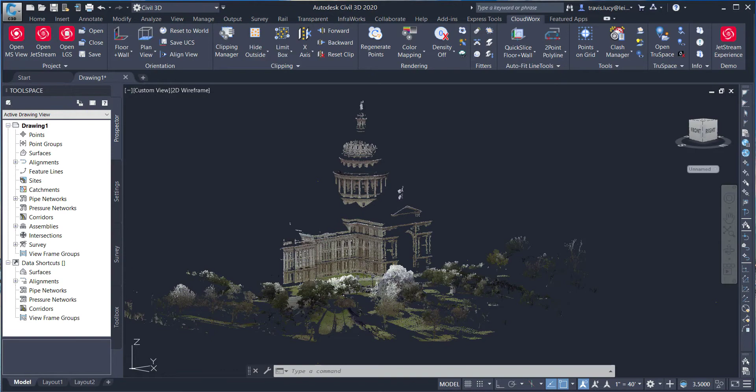In this video, we're going to see the tools offered in the rendering panel and how we can change the way the point cloud is displayed. We will find in the panel 6 different tools shown for rendering.

Moving from left to right, the first is Regenerate Points. While working on a CloudWorx project, if we ever suspect that we do not have all of the points available in view, hit Regenerate Points. This will bring all the points back that may have been invisible.

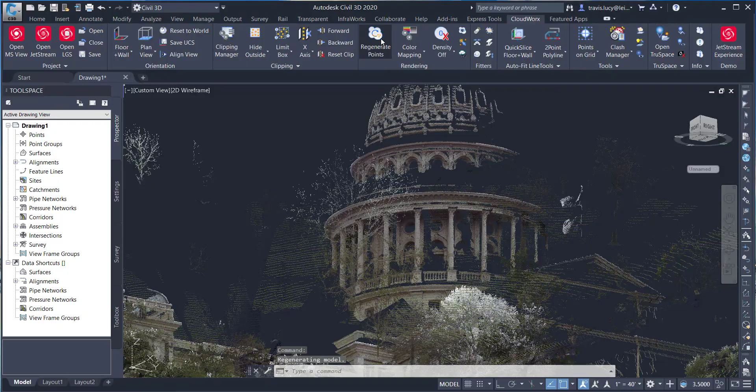The next tool is Color Mapping. Color mapping allows for us to select styles consisting of true color, intensity mapping, elevation mapping, distance mapping, and appearance. Because true color and intensity mapping are the most common transitions working with point clouds, both of these options are also available for selection in the drop-down arrow of the color mapping button.

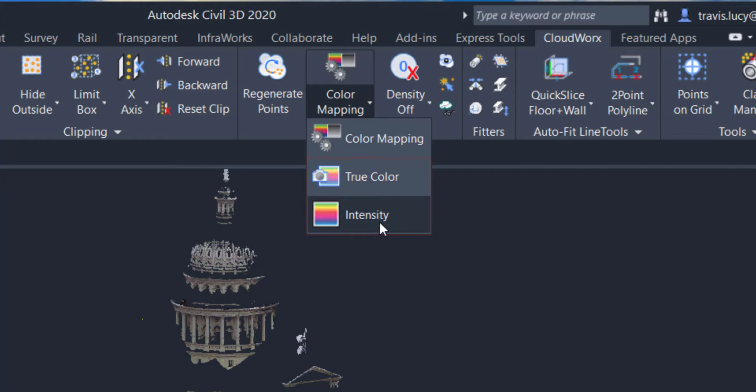True color shows the point cloud colorized from the images taken while scanning. These can be from internal or external cameras. Intensity mapping is colorized by the strength of the laser return. The higher intensity return points will receive cooler colored points that are on the blue end of the spectrum, while the lower intensity return points will receive warmer colors, more towards the red end of the color spectrum.

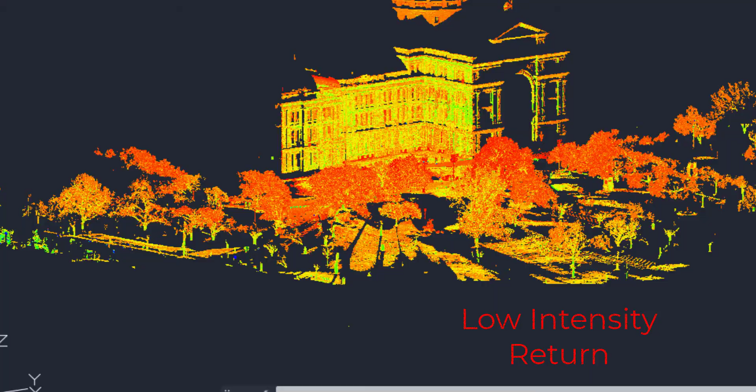Most of us find it easier to see the fine details within point clouds using intensity mapping. So if we are scanning for data extraction only, and the images and colorization are not needed for other purposes, we can cut a significant amount of time in the field collection and the data processing, as well as reduce the file size if we opt out of collecting images.

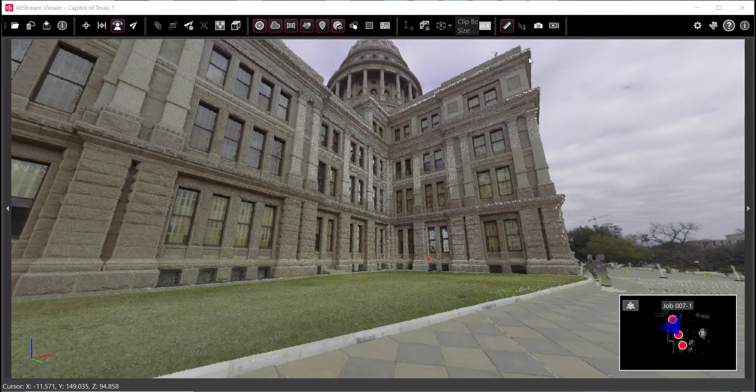However, capturing images can have a significant benefit if you're using other applications in which photo images are ideal. I will cover one of these instances as it applies to CloudWorx in a later video in this series.

Looking at other settings within the color mapping dialog box, we will see a drop-down for color scheme. If our eyes are better suited for different brightnesses of the same color, we have options for scales of gray, red, green, or blue. If we select grayscale and move the gamma correction value closer to 0, we will brighten the cloud color if it appears to be too dim.

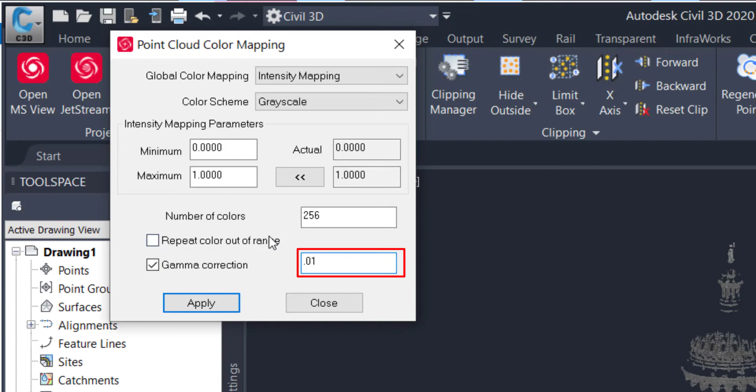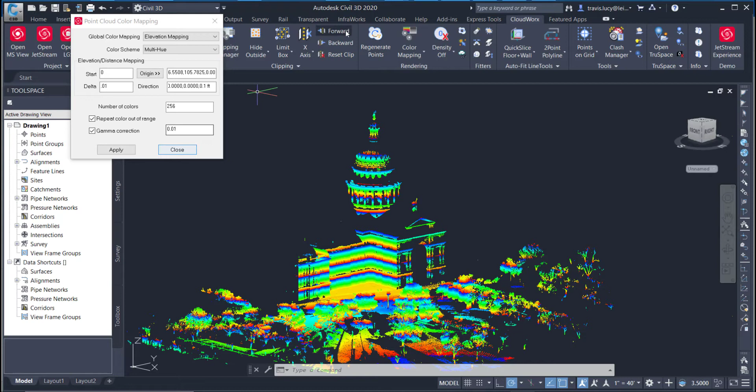Elevation mapping will color the point cloud based off the Z value of the points and the parameters we set. You can pick the origin to get your benchmark and set the distance of the changing color by entering in a delta and a moving direction from Z. This is a helpful feature when you have elevation changes that you would like to have stick out, or on roads when locating manholes or potholes by highlighting the changes in elevation.

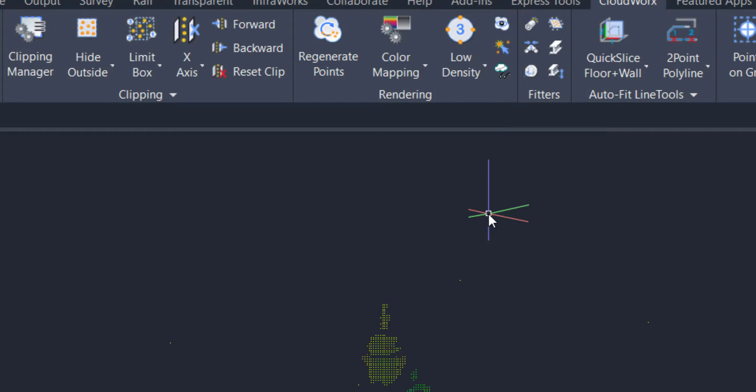Distance mapping uses the same concept as elevation, except it uses the horizontal direction. The density setting can be used to help reduce the point display. This can be used with file types that are slower loading to help add speed to the loading process. Density off means all points are displayed.

The point visibility quickly toggles on or off the entire point cloud and is helpful when you want to see what you have extracted clearly without the point cloud obstructing your view. The point snap quickly toggles on and off our ability to snap to the point cloud.

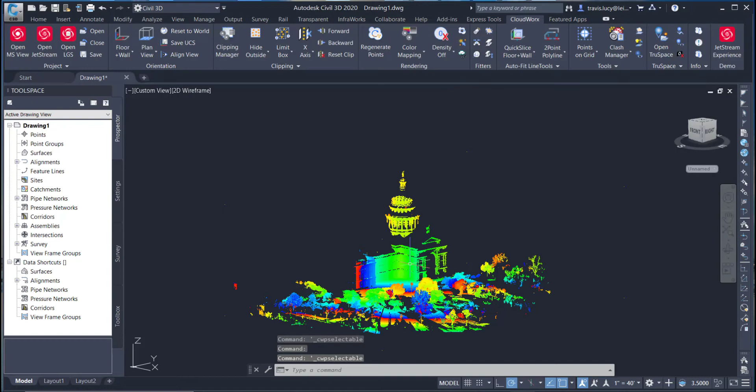And finally, the toggle silhouette greatly reduces the amount of points so you can better see what you are extracting, but without removing the point cloud entirely. Now that should fully cover the rendering panel.